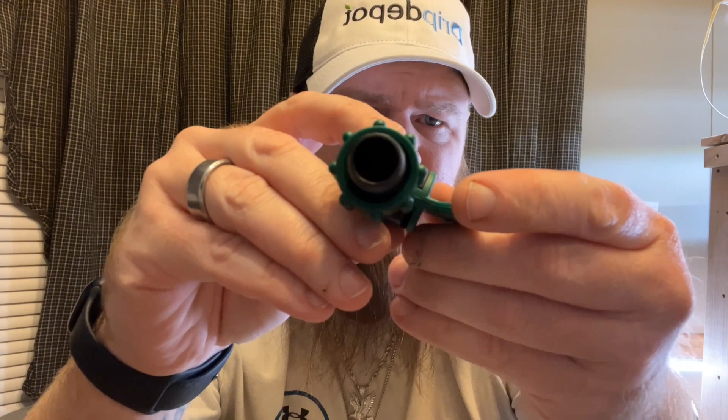Adjustment right here, so you can shut it on or off. It's a ball valve inside of there. You can see it, let me see, yeah right there. You can see it, so yeah, and then you just shut it off like that, and open it back up.

All right, so anyhow, this barbed end goes into your drip line. This right here, your drip tape goes onto it. When you put your drip tape on there, you have this and you thread it like, see right there, like that, it's all the way back. Slip your drip line up on there, and then take this and turn it like so, and that tightens up on your drip line.

All right, and then you're good to go, your drip line won't be able to come off. Then on your other end, you'll have to roll that drip line up and kink it off there, and they got some other things for us to do that. We'll talk about that and show you all that whenever it comes to it.

We're not going to be laying the drip line because it's wintertime here, so there's no need to lay the drip line. But I am going to run the full system. I'm going to set up the pump system, set the main line up, and take the main line all the way down. I'm going to put one of these in just for demonstration, but I'm not going to put all of them in. It's wintertime, there's no need to do all that right now.

I'll wait till about March and start to really set the system up. Probably end of March, beginning of April, I'll go ahead and start putting these in on everything we have here, because we're hopefully going to be doing a lot of the whole area. Right now we've got enough to do patch 1 and the main pumpkin patches, where I grew the 5 big ones, and this side where me and Kira's big one, Jaden's, and Mommy's grew. So we'll be over there on that pumpkin patch too.

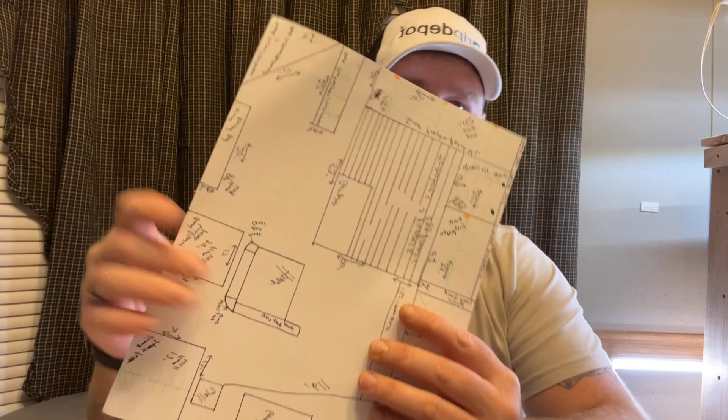Okay, so let me go get the drawings and I'll explain this a little bit better. Where is all of my drawings here? There's tons of drawings, we got tons of drawings here. Let me just get around all that. So I know it looks like a kid doodled this, but work with me here.

So you can see here, this right here is the well. Here's the greenhouse right here. Here's the well, here's the greenhouse, here's the house. Now I done told y'all, stop. The house, no stop, go on, get out of here.

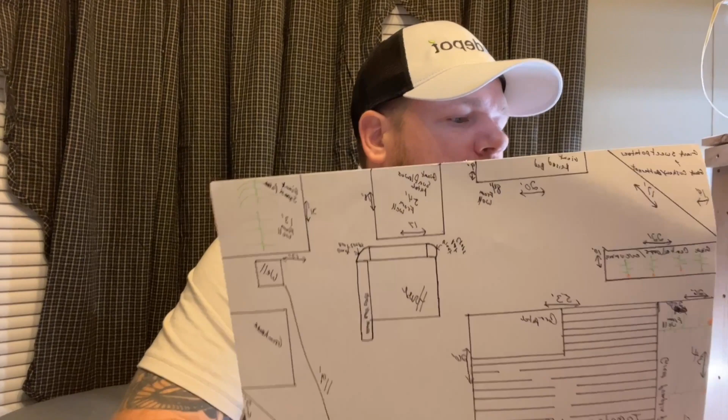So you got that main house right here. You got our sunflower patch here, our squash patch right here. Squash patch right here, sunflower patch right here. Here's the raised beds area right here with the giant tomatoes and stuff.

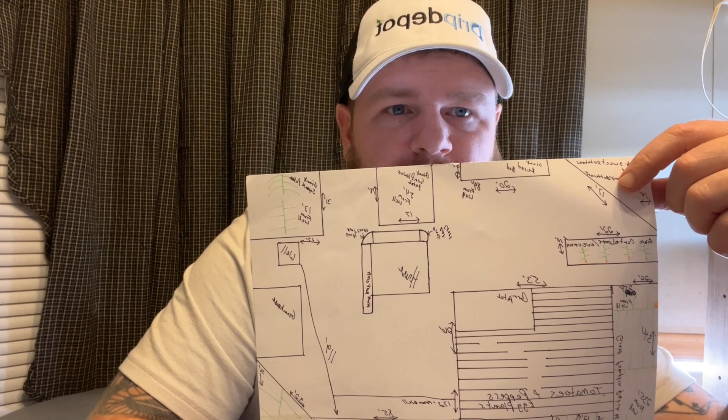Over here, I know it's not really catty-corner like that, but I was running out of room, so I had to catty-corner it over here. But I took the proper measurements, and that is right there, where we grew on the other side of the yard, where we had the butternuts, a couple field pumpkins, and the cushaws at. Okay, that right there is where that is.

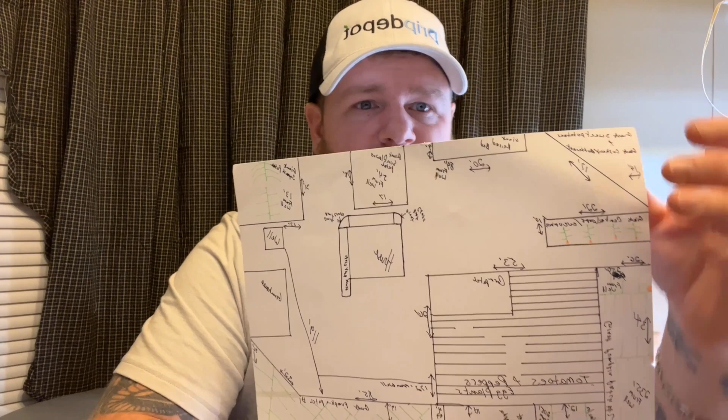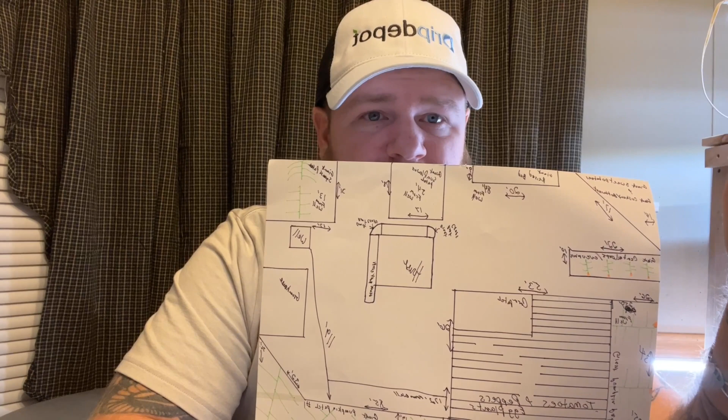This is my cantaloupe patch, and then right here, you'll have to just imagine there's a building right there, so you know where it is over by the trailer. Well, you see that building, and then you see this right here is the cantaloupe patch. And then we have the trellis that would be right here, but we're going to move that trellis system out of there. It's not working there, we'll have to figure out somewhere else to put it.

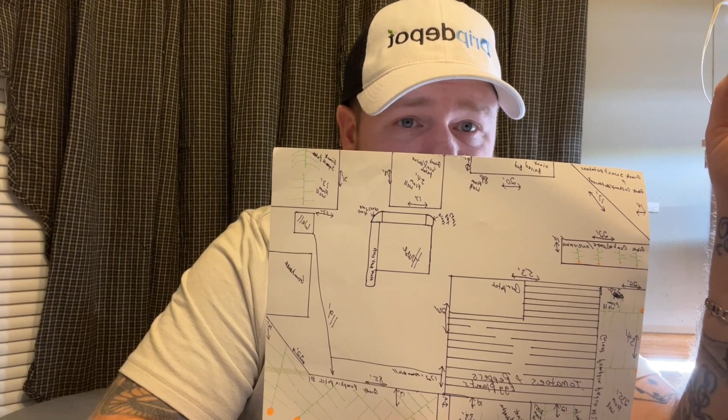I'm thinking about on this side of the yard, over here in this space where the greenhouse is. I think that right there would probably be the best place to put it, but we'll talk about that later. Anyhow, here's the main garden right here, okay? And look, there's probably going to be a setup in there for a high tunnel, probably right here, the 24 by 24 of this will be covered with a high tunnel.

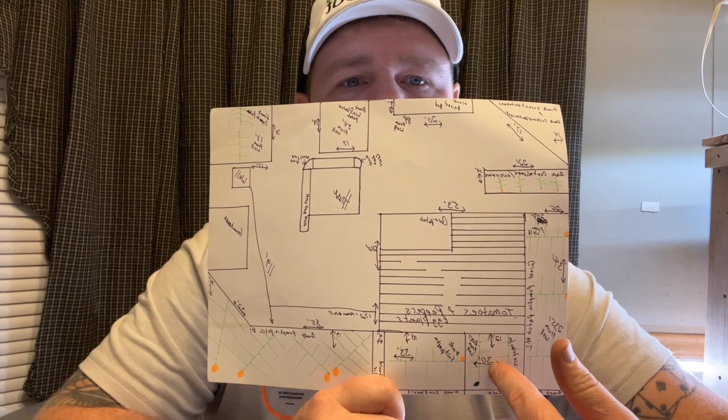And then down here, you can see this is our main patch right here, and over here is patch 2. The main patch 2 is all this right here. And then you can see here, this is split up for the giant field pumpkin and giant watermelon right here, so those are those 2 patches. And then you can see that little sliver right there is the giant long gourd patch where my trellis is at, my long gourd trellis. So you see here, we start at the well.

We'll run that main line all the way from the well, all the way down here to the main patch. Now at the main patch, the way I drew it is a little wonky, so you'll just have to work with me.

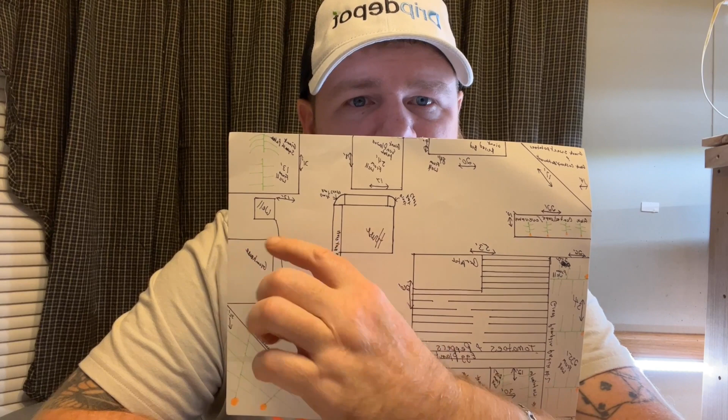You can come from here to here just fine and hit that corner right there just fine. There's nothing going to be in the way of that, it's just the way it was drawn on here. The greenhouse will not be in the way. I'll be able to come straight from that well straight here to that point.

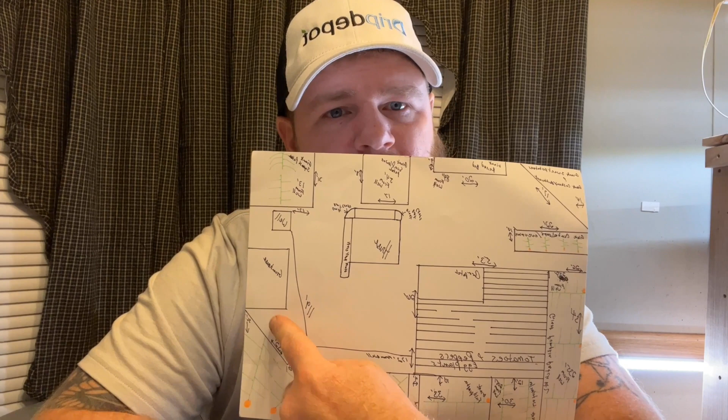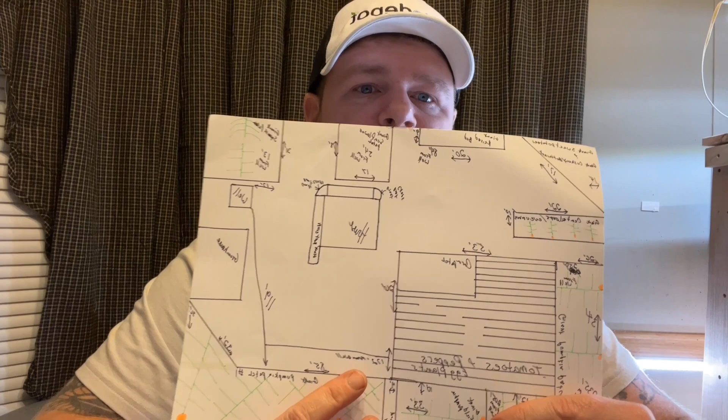I will then run the main line at that angle right there, and then run the main line all the way over here. All of this right here, this corner, from there to there, that is 32 foot wide right here, and then this right here is 85 foot. So that entire thing, the 85 foot and the 32 foot, is all going to be covered with a main line right at the edge of that.

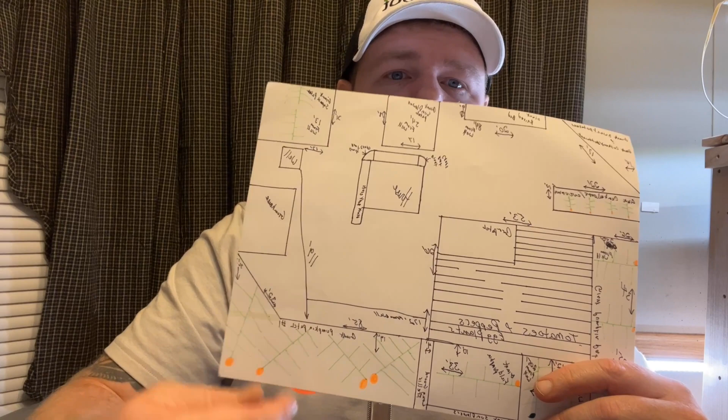Now what will happen from there is the drip lines will then be placed in here, and they will run this way, coming down this way. There's the main patch, and that right there is exactly how the drip line is going to come, the blue lines. So the drip line is going to run just like that.

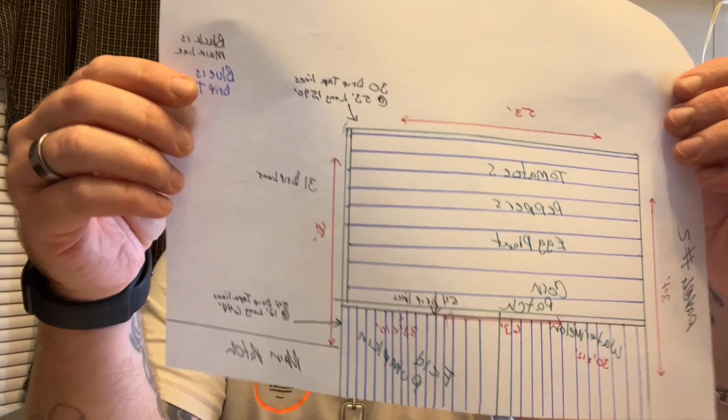Same way over here on patch 2, the drip line will run that way right there. So that's how that's going to look. I'll show you this, the tomato and peppers and eggplant patch and the corn patch, those are going to run this way. The watermelon and the field pumpkin patch will run down this way.

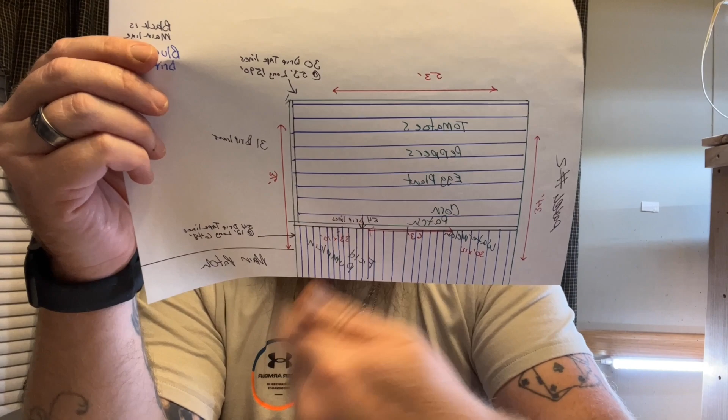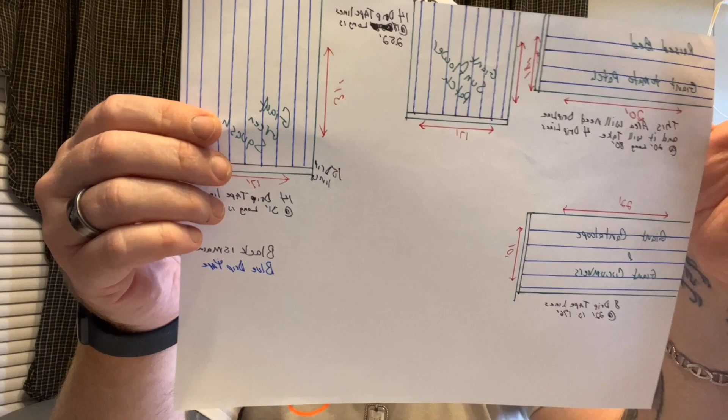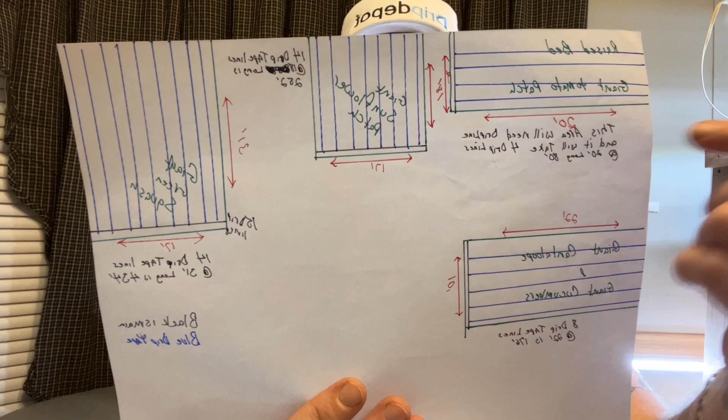And then you'll have your sunflower patch and the giant cantaloupes and the giant tomatoes and stuff like that, and then over here your giant green squash and stuff. So all that right there will be, you can see how it's going to be run. Sunflowers will be running up and down, and these will be running side to side.

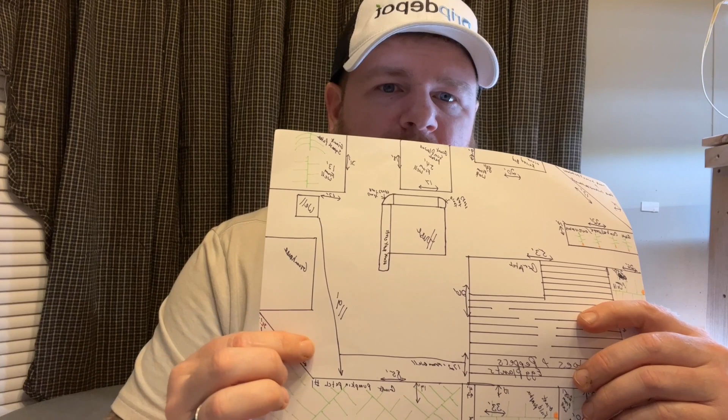So like I say, going back to this drawing, we're going to come down here, we're going to take all that line. It's 119 foot from the well to the corner right here, where we're going to be starting our main line. Once we get there, we're going to bury all this line, then bury all that line there. Not like bury it, but like maybe an inch under the ground or something, just to keep it where we can deal with it.

Anyhow, all this though, this right here, this 119, will definitely be buried deep. Well, not deep, but deep enough where we won't be having to worry about it with the lawnmower anymore.

So then once we get here, this will be probably just barely under the ground, right at the edge of the patch. So I mean, you're going to be able to see it because we have to put that fitting in on that. I just want to make sure that it's just kind of tucked away, really. That's all we're looking for.

So when you put it at the, like, if this is the top of the yard and this right here is the edge of the patch, we're going to set it right here. It's going to run the edge of the patch, so it's going to be down. It's not really going to be under the ground, but it's going to be right there on this edge of it, so it won't be flush with this. It'll be sitting like down there. So I hope that makes sense.

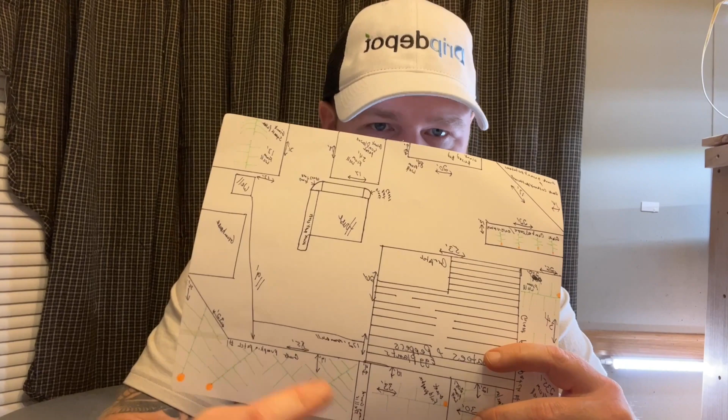So anyhow, then we'll do all that right there like that, and then we will go and get our plugs.

We'll put the holes in the main line and get the plugs, these 5/8 inch barbed shut-off valves, and plug those into the main line. Then in the springtime we'll come back and put our drip tape in on those shut-off valves.

Each one of those valves are shut off, and that's going to be helpful because there's a theory that if we feed the old plant less water and the new plant, the back half of the plant, the first 10 foot, needs less water supposedly than the front half.

We're talking about the setup, but just so you know, that's why we need the shut-off valves. If we got the shut-off valves, we can water what we want to water. We will have to manually turn it off, but we can still water the back half, the front half, or the whole plant, whatever we want to do.

So moving on and seeing what else we got here. All right, so this is all what it's going to take to kind of put it all together.

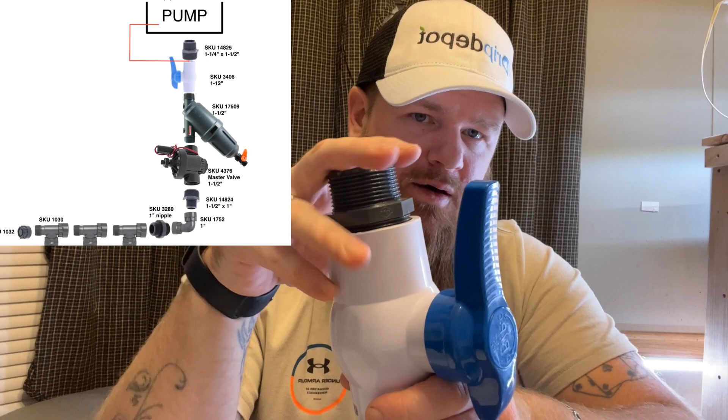Okay, because this right here is what's next. So you'll have your pump getting onto right here, and then you're going to have the 1 1/4 MPT going into your 1 1/2 into your shutoff valve, which is right here. It's a ball shutoff valve.

Then you're going to be going into... where is it at? Where is it at? Let me see, where is it? Over here, nope, that's drip tape. One minute, here, ah.

From that into this thing right here, so this will go like this. No sorry, like this, okay so it's facing down. Goes on there like this, right here.

Now I'm just dry fitting all this. It's all going to have pipe thread put on it, and pipe tape or whatever you want to call it, put on there. So it's going to go like that, you can see the direction of the arrow, the water is showing the water is going to go this way. All right, so that's how we got it.

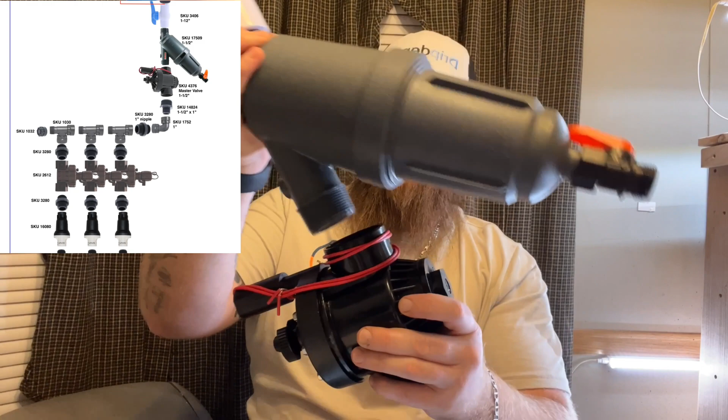Okay, so let's go find our master valve over here. All right, so here is our master valve, goes just like this right here, and we're going to thread it on like so. Well, this is going to come off there.

This is your micron filter, all right this is what this stuff is. This is probably the injector and stuff, probably gets hooked up to this. Okay, there we go, now this goes in here just like so.

Wow. How's that? How's it supposed to get on there tight? Something's got to go there. Some sort of a fitting has got to go here to extend that down some.

We have another 1.5 to a... I think it's right here, we go into it, right there. Yeah, 1.5 is a 1 MP. So this one right here is going to go right here like so. Alright.

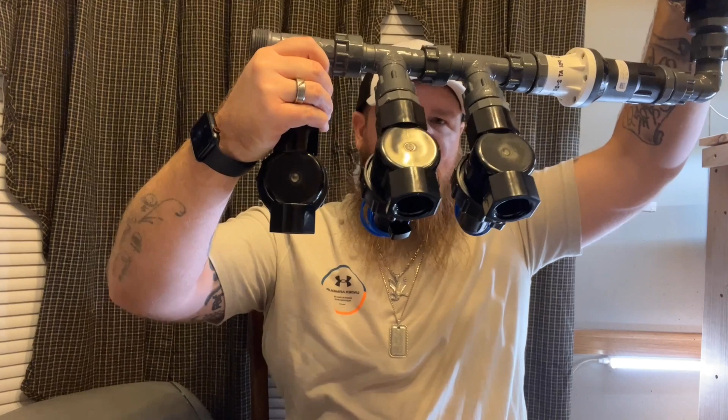Alright, now this one goes over here. I'll lift it up and show y'all what it's looking like on this mock setup here. Alright, so there we go, and right there is how it's starting to look. Alright.

And then from there, okay guys, so we're back. New day, new time. I went back through all my emails because I was sitting there scratching my head thinking something's not right. I had the wrong paper printed off.

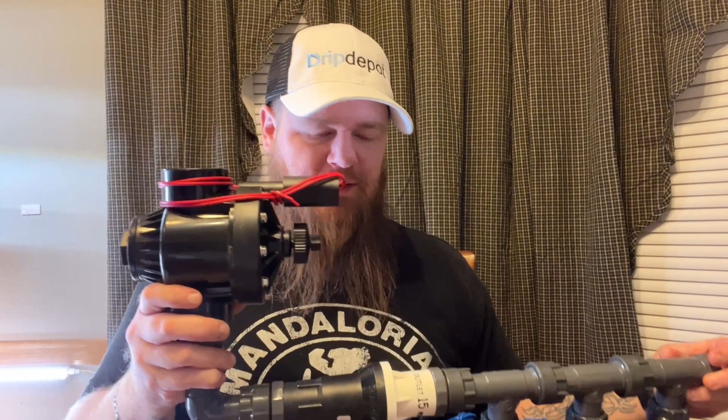So, you remember what it looked like a minute ago? I took the micron filter off. I still have to figure out how to get the micron filter put on here because it rubs. But the picture that I had shown you where this went into here, that's wrong.

So this comes off of here just like so. I'm going to take this out of here. I'm going to put it all back together here in a second. This comes off like this. We don't need that for just yet. This comes out of here. Well, I guess I could have just left that one in. Anyways, thread this one back on and then put this like so.

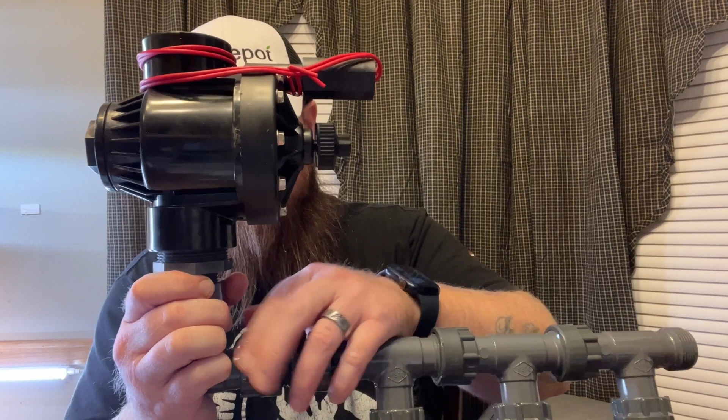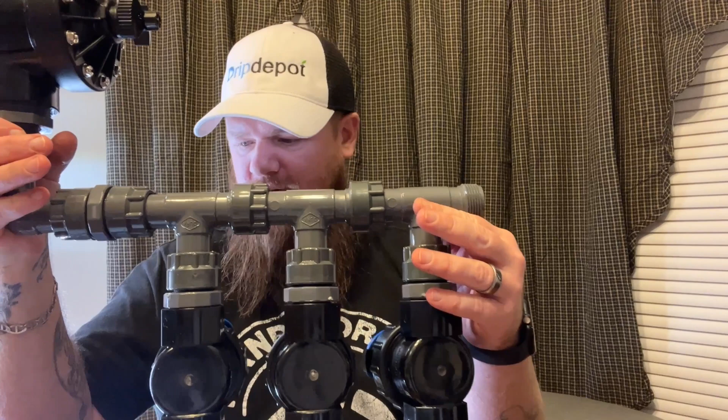Alright, now we have the correct configuration. So just scratch the configuration I showed you a minute ago. All this is proper. We just removed this piece. This is all correct right now. This is how it's supposed to be. Now this end cap, part number 1032, we're going to screw it right on here.

There were so many emails and I thought I printed off the right one. So, my fault, I confused myself, and then it happens. So now we're here at this juncture.

Alright, you're just going to have to pretend that the micron filter is sitting on here. I'll put the correct picture up here again so everybody knows it's the correct one this time. I went back, I've looked and looked and looked and made sure. So the next thing we're going to do when we come out of our part number 2612 is put 3280s here on the bottom again, just like so.

Put your 3280s on here like that. You get the rest of these 3280s. 3280, okay. And another 3280 right here. Like so. Alright, so there's that.